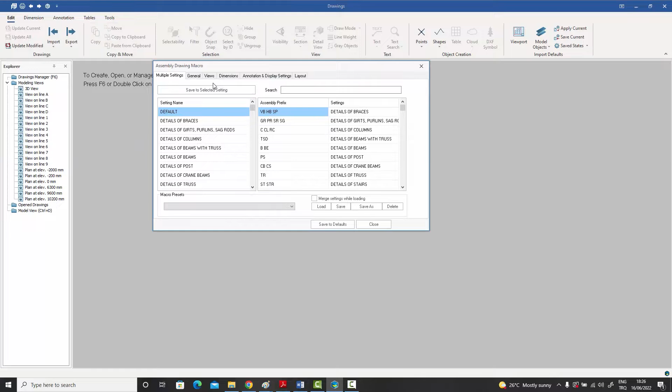In this video, I'll be talking about a very important setting of assembly drawings, which I had mentioned in the video which was generally about drawing settings of assembly drawings. But I had kind of glossed over it, in the sense that I had said that I'll explain that in a separate video. And it was in this Views tab over here, and this is this one, which is called Keep Your Manual Changes, right?

And I had said that this is to do with when you have assembly drawings and you update them, then if you had made any manual changes, they get lost, and that's a difficult thing to maintain. So this video is entirely devoted to this one feature called Keep Manual Changes. Let me go back to the model and take you through the process of how this particular feature works.

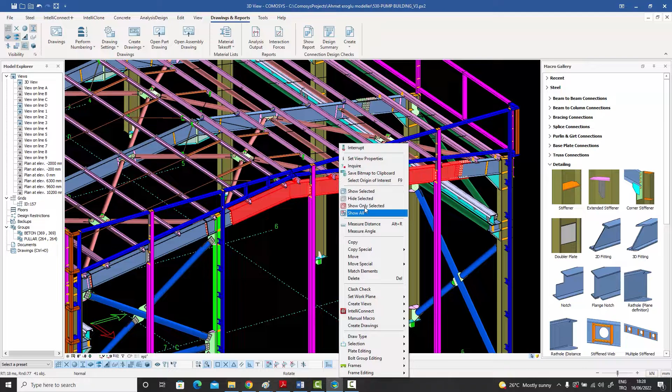So let's choose any assembly. Let's take this assembly, for example, right click and say select the assembly. It's a bit of an odd looking assembly. The beam is welded to the end, and say show only. It's got these double plates in the center, these purlin connections, on the other side these gusset plates, and there's splice plates at the end as well.

And let's say we want to create an assembly drawing for this. How do you do that? Well, it's very simple. You basically just select the assembly. Well, let's perform the numbering first. Let's say apply and start numbering. And when the numbering is finished, we can just select any part of the assembly, right click and say create assembly drawings.

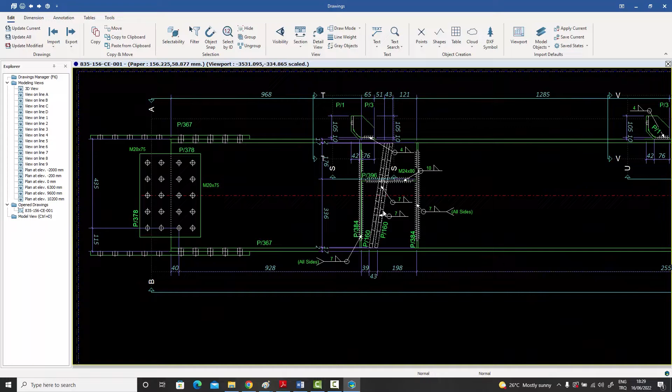And now it's created that assembly drawing. Let me double click on the drawing manager, and here is the drawing. Let me double click on the drawing to open it. This is the assembly drawing which it has created. Let me zoom in. Here are those weird looking plates, the purlin connections over there, the plates on the other side.

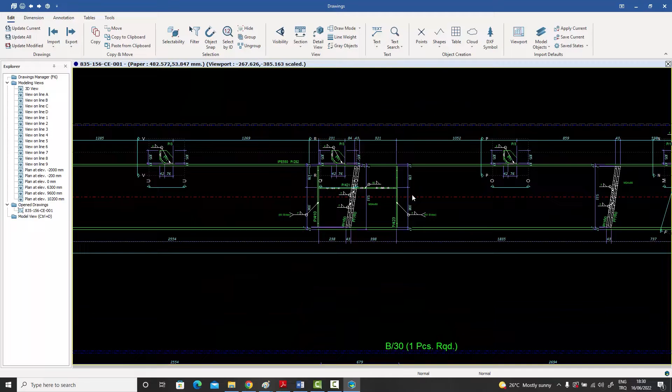You can turn off the visibility of these welds if you want, by the way. The symbols will remain, but whether the welds actually show or not will depend on your choice. So here we have all the single parts drawn, all the plates have been shown, and this is the assembly we have.

Now let's say I'm not very happy with this assembly and I want to make certain changes. Normally, if I were to then go back to the model, make a modification to this assembly, redo the numbering and then update this drawing, any changes I had made to this drawing would be lost, because those would be manual changes, and the assembly macro would run from scratch. So I want to take you through those steps now.

Like I said, let's say I'm not happy with this drawing and I want to modify it. I could be unhappy because of the annotations or the dimensions, usually those kinds of things. Or maybe there's an extra view which I want, which the automatic assembly drawing hasn't taken, or hasn't taken the way I would have with whatever depth of view. So let me make a few changes just so that the idea can be understood.

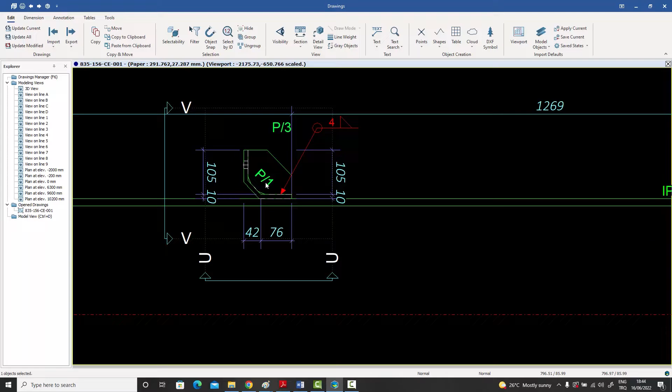Let me zoom in, and let's say I'm not happy with this welding symbol over here. It's showing the welding, but I would have put it a bit on this side because it was clashing with the P1 over there.

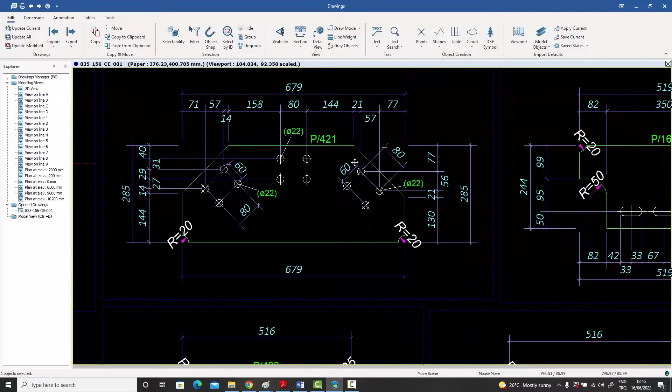Now, for example, let me zoom in over here, and okay, I see that this annotation of the weld is clashing with this, so I can maybe move this a bit to the right and leave it like that. Now let me zoom in and see these single parts. They're looking okay. I can live with those. Let me move in there. It's taken an RR section over there.

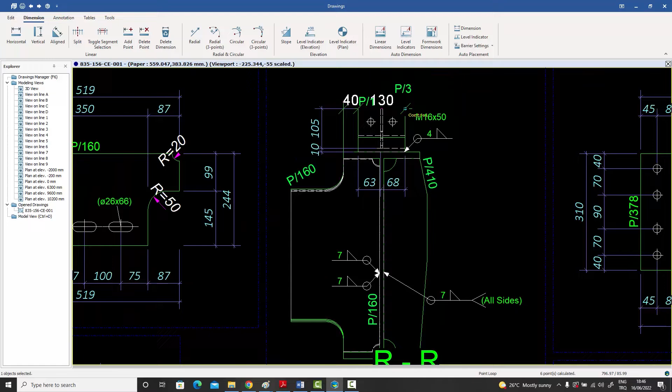Maybe it's not very clear whether this folded plate is in the center, so maybe I can go to my dimension and give it a dimension like that, and like that, and kind of leave it over there. Zoom in there, take this P3 and move it a bit. And basically I'm happy with it. Maybe I can draw an extension line now like that. And I wanted to add this extra dimension.

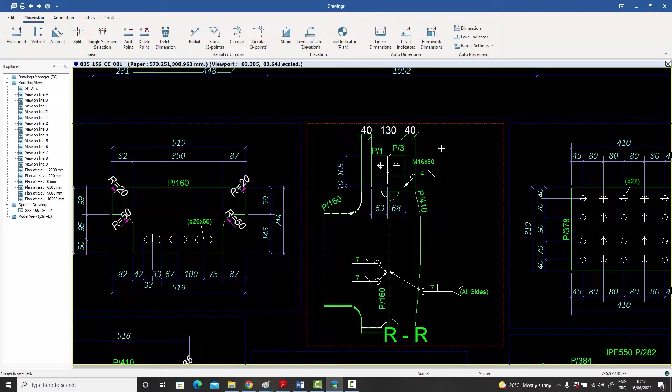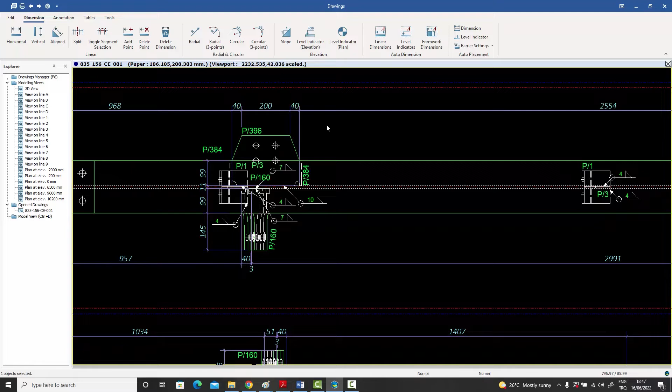So these are things I can typically do with my drawing. I can move around weld symbols, I can move around annotations, I can add dimensions, I can perhaps go in there and modify an existing dimension. So although this is not required, maybe I want to just add these points over here to an existing dimension. Maybe this is the way the shop wants it, and I can do all that.

Another thing which I might want to do is, because these are very close, I might want to pull them out a bit and maybe take this one and pull this one completely out, so they look a bit clearer now. So these are the kind of things I can do with the drawing.

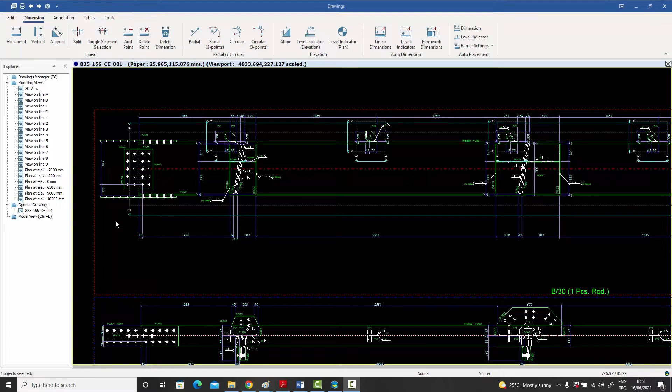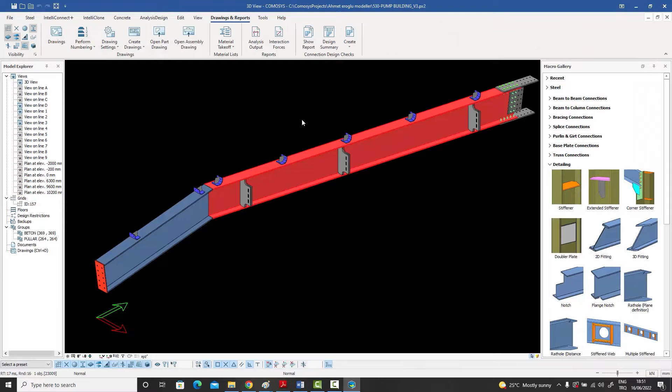Now let's say we are now happy. I mean, obviously I'm still not happy, but let's say we are happy, and I just close the drawing and save it in its existing state after the modifications which I've made, and now it's saved away in the drawing manager with the modified version. Let me go back to my model, and everything is fine right now. If I were to take a printout of that drawing or send it to the client, it will be in the shape in which I've left it.

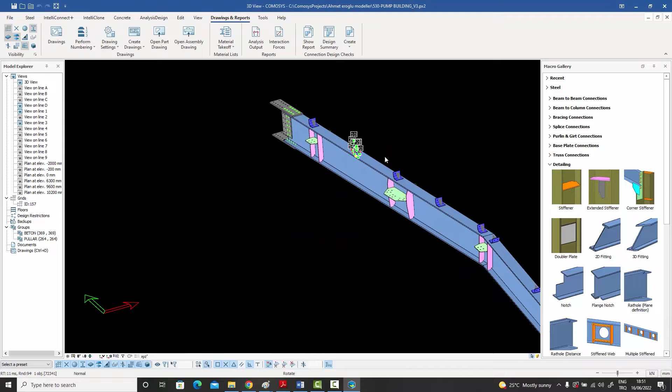But more often than not, we have revisions in such structures, and not only once, but sometimes many times. So let's create a revision now. For example, maybe I can create a stiffener over here somewhere. Yeah, that looks like a neat spot to create a stiffener. So I can go to my stiffener command, select the assembly, give it a point like that, and create a stiffener over there.

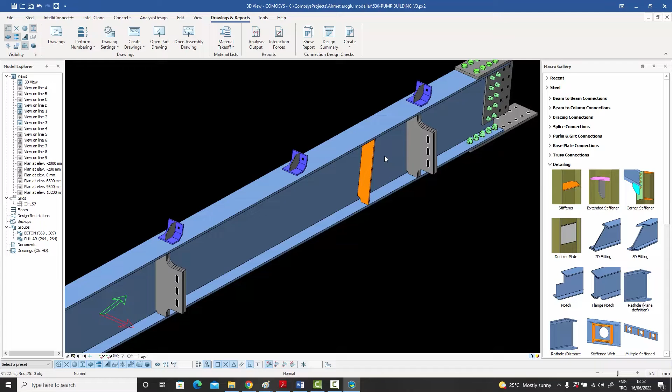Now I've made a change. This has basically changed the assembly, and what is needed now is numbering. And obviously when I do numbering, the drawing would also need to be updated. So let me go through the numbering process. Just remember where this is, near the end towards where the splice was. After these double stiffeners, I've added a normal stiffener.

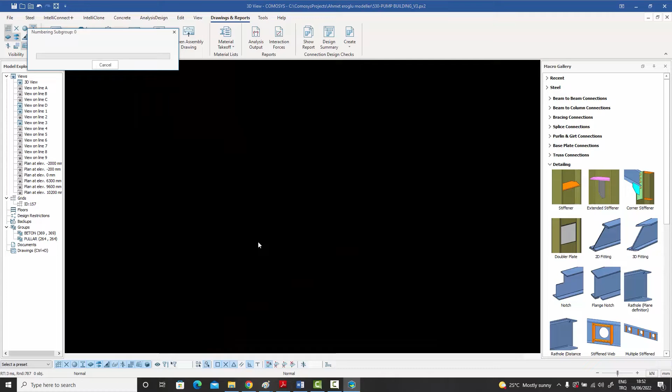So let me go to my numbering and say perform numbering once again, apply and start numbering. Now that it's done, let me press OK and press close, and that's the end of my numbering. Now let's go back to the drawing side. Let me double click on the drawing manager and open this drawing. This drawing has been frozen, so it won't be updated.

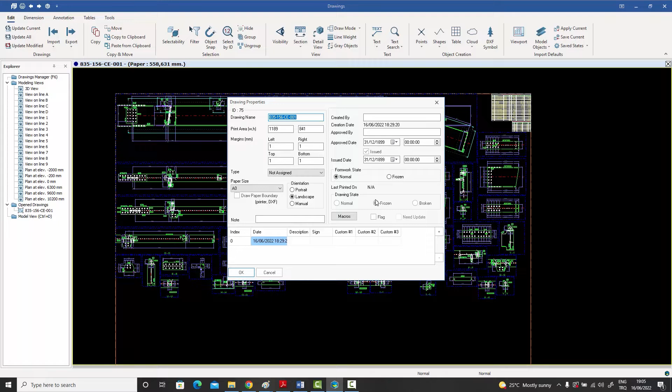What that means is that the stiffener won't show right now, because I've purposely stopped the macro from updating by using the freeze option. You can freeze any drawing, and the last time it was created, it was created with the freeze option. So right now, if you zoom in, you will see that my changes are over there. I had moved these dimensions up, this one down. I had added these dimensions.

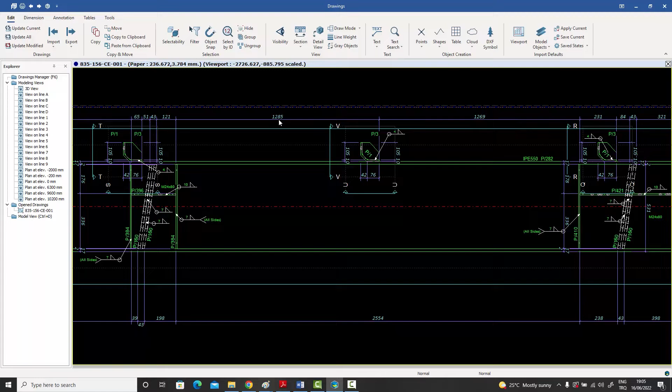They're all there, but the stiffener, which was supposed to be over here, hasn't been imported yet, because I've frozen the drawing, and by freezing it, it breaks all links temporarily. It doesn't allow the macro to run again. And the problem is that when the macro runs again, the stiffener will come, but the changes I had made manually will be lost.

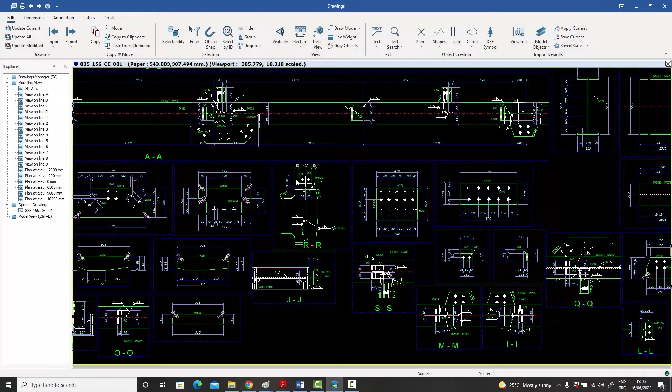So I had added these dimensions over there. I had gone in there and moved this annotation a bit to the right. I had made certain changes, added this dimension to show that this is symmetrically placed, etc. And now my problem is that I have made a change. I've added a stiffener, but I've also done many manual changes.

On the one side, I want the new stiffener to come in, and on the other side, I don't want my manual changes to be lost. And this is what that feature, that setting of the assembly drawing settings called keep manual changes, does. So let's update the drawing and see how that behaves.

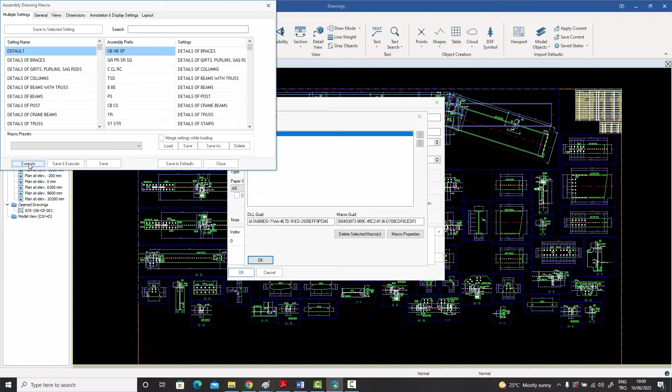So let's double click anywhere on the drawing, go to my macros, double click my assembly macro. The keep manual changes feature was on. Then all I need to do is just say execute, and then close and turn these off.

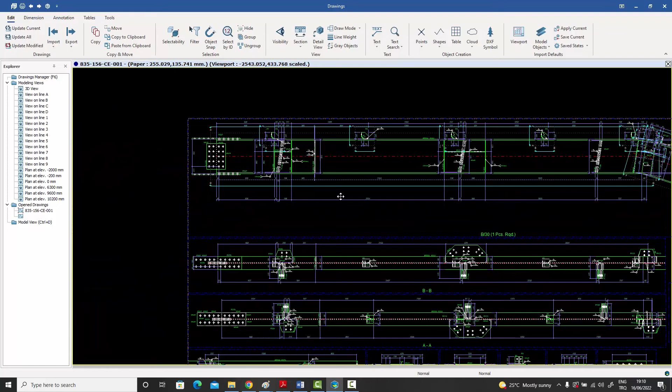And now I can immediately, first of all, see that the stiffener has now been imported and it has been dimensioned. But what's good is that my weld location has also been preserved. And if I were to zoom in there, these extra dimensions which I gave have also been preserved.

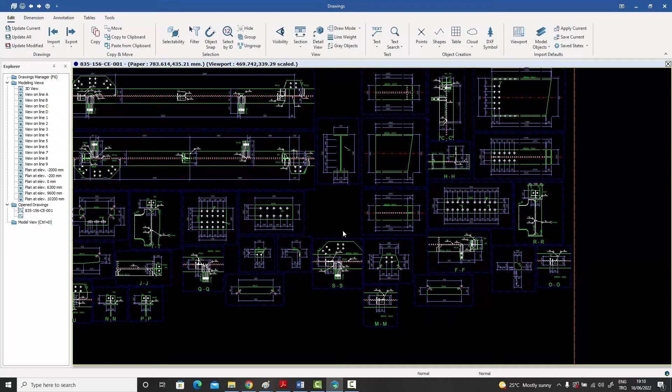Similarly, if I were to move down a bit, this annotation was clashing with this weld symbol, and I've moved that. There was a section called RR section. It was somewhere over here, but it's moved somewhere else. Yeah, there it is. In that RR section, I had given these extra dimensions to show that the center folded plate was symmetric with respect to the I-beam.

So all my manual changes are still there, and the new stiffener has been imported and dimensioned as well. So this is exactly what I want, and this is the reason why we have this keep manual changes feature. Like I said, this dimension was moved down by me manually. The other one was moved a bit up. So my manual changes are there, and the extra stiffener has also been imported and dimensioned.

And this is exactly why we need this setting called keep manual changes, because in steel detailing, although in COMOSYS more often than not your drawings are very clean and you can use them directly, every now and then, especially with complicated assemblies, you do occasionally have the need to modify stuff.

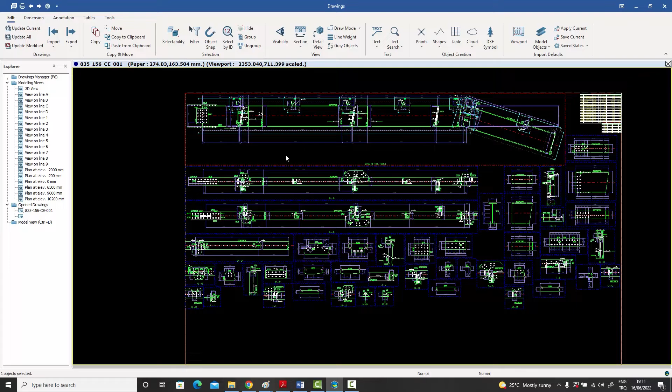And I've shown you only moving around the annotations, but you can also create new views, for example. So if I wanted an extra inclined view over here from these stiffeners, I can go into my section command and create a sectional view, and I can insert that view over here somewhere, and that will be a totally manually created view.

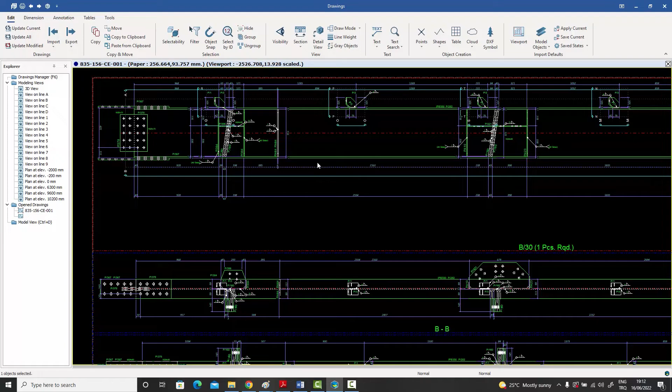And then let's say I go back to the model and insert another stiffener and do the numbering again and update this file again, that new stiffener will be available over there. But in addition to that, my new view, which I had created manually, will also be available. So this is a very powerful feature which allows you to do a lot of things.

The one thing which it doesn't allow you to do is delete views in the present version. So if you want to delete certain views and you don't want them to show in the drawing, you can take that view and just move it outside the drawing, and in the next update it won't place it back inside, it'll keep it outside. So when you do a DWG or DXF export, that particular view will not be exported. So you can do a workaround like that.

It doesn't allow you to delete stuff at the moment, because deletion creates other problems, and then there is no way to actually maintain the indices. But you can move existing dimensions around, you can add new dimensions, you can add new annotations, you can modify existing annotations, you can totally rearrange these views, for example.

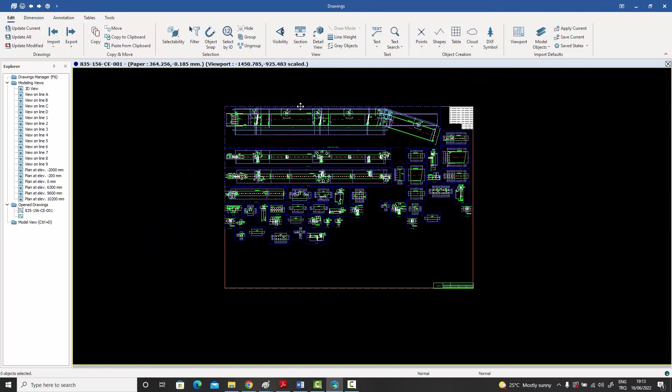So you can move this view over here, and you can move this view over here. Let's say you want to do a rearrangement of views, and you feel that's a better way of sending this drawing to the shop. And after all those modifications, somebody adds a stiffener, but you've made so many manual changes regarding the overall layout of the drawing, and you want to preserve that layout. With this option set on, all you need to do is just update the drawing, and all your manual changes will be preserved for you.